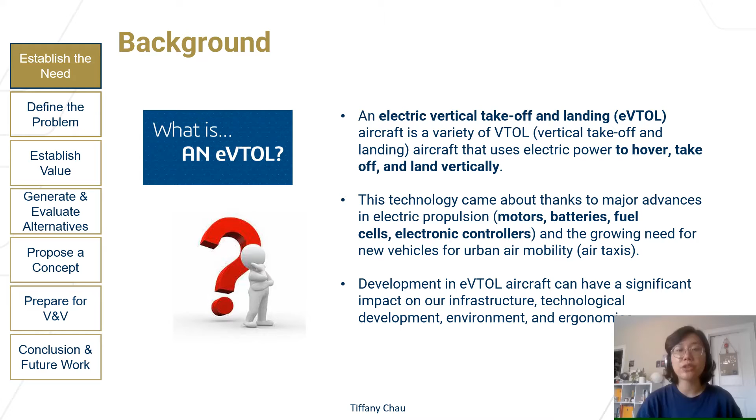First off, what is an eVTOL? It's an electric vertical takeoff and landing vehicle that's completely powered by renewable energy. The development in eVTOL aircraft can have a significant impact on our infrastructure, technological development, environment, as well as ergonomics.

Since the number of passengers utilizing public transport is increasing every year, having another mode of transportation, namely urban air mobility, can help alleviate that yearly increase. The development of more efficient renewable energy is an important technological impact, and this technology can help reduce CO2 emissions from commuter traffic.

Something our team is focusing on is also the ergonomic impact. This eVTOL design is going to be a fresh opportunity to incorporate accessibility for disabled passengers.

Now, we realize that we're not the only startup trying to enter this space and industry. There are other groups such as Joby Aviation and Kitty Hawk, which have some level of certification, some level of prototyping and testing either complete or underway, but neither of these companies have managed to enter the urban deployment phase. Because of that, our company has an opportunity to catch up.

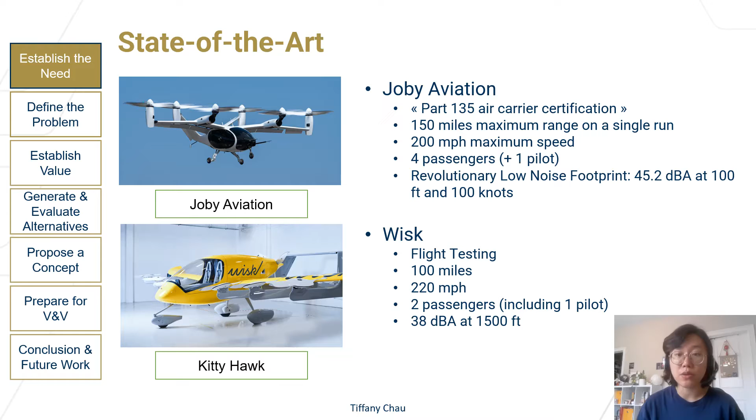And the same goes for VoloCity and Archer. The information we found on these startups is that they're able to accommodate passengers and pilots, but nowhere do they really mention a focus on disabled passengers.

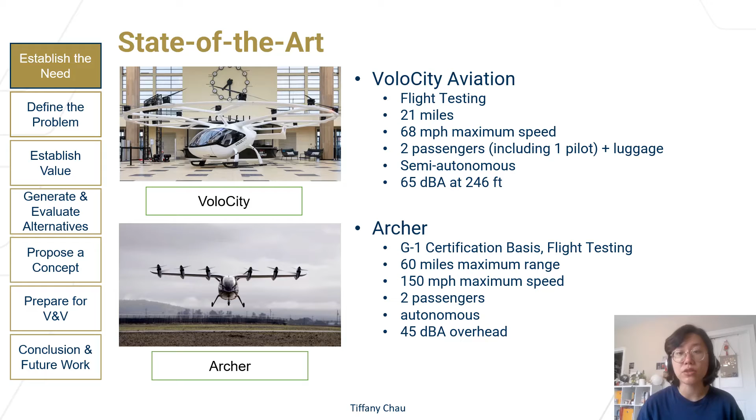There are many different stakeholders in our project. Passengers with reduced mobility are the first and foremost priority. They would like for this aircraft to be safe, comfortable, as well as affordable. Some other groups which would have a stake in our eVTOL aircraft would be the local community, since these would be deployed in residential areas, air traffic control, as well as electric propulsion engine suppliers.

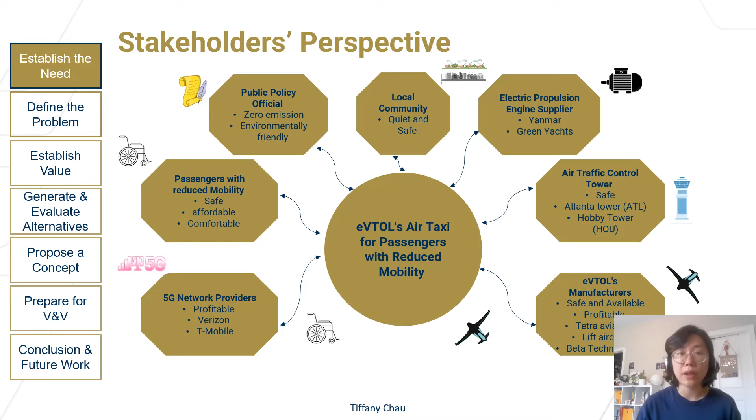From these stakeholders, we were able to derive a list of their implicit and explicit needs. This includes configurable cabin seating for those with disabilities, cabin navigation for people who are having difficulty navigating physical space, ingress and egress support equipment, completely battery powered, ability to travel a certain distance, etc.

Now, our team has mentioned a couple times that we want to design our eVTOL with the disabled passenger in mind. And why is that? Disabled people struggle every day navigating these traffic dense areas, and some of their disabilities impact the way that they navigate physical areas, such as the ability to climb stairs, navigate uphill terrain, navigate curbs and sidewalks, etc.

And then there are some disabilities that are not too obvious to the eye and impact their ability to operate vehicles like cars, such as people with limited eyesight and hearing. All in all, navigating the world is just highly stressful and uncomfortable for some of these individuals, especially in an area where the disabled person is not the primary user. And thus, we want to make them the primary user that we're designing for.

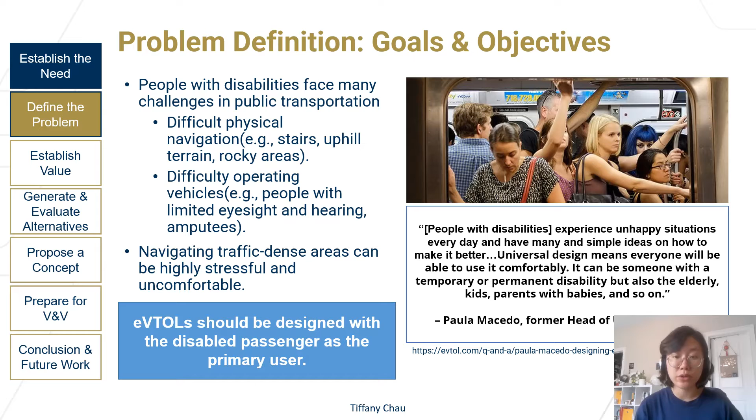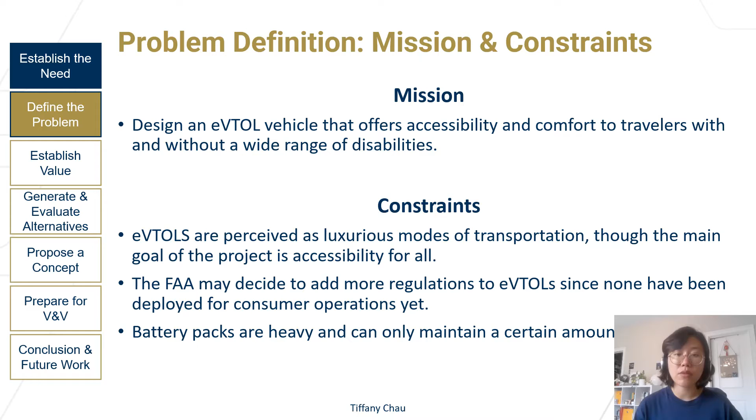And so our main mission is to design an eVTOL vehicle that offers accessibility and comfort to travelers with and without a wide range of disabilities. We have identified several constraints, and we'll be addressing some of those later on in our risk management.

Our concept of operation starts at the takeoff site. After taking off, whether it be from an urban, suburban, or rural area, the vehicle will be communicating with other aircraft, air traffic control, and other information sources during the flight. It will, of course, navigate the urban areas safely, which have a lot of tall buildings. And after landing at point B, the cycle starts all over again.

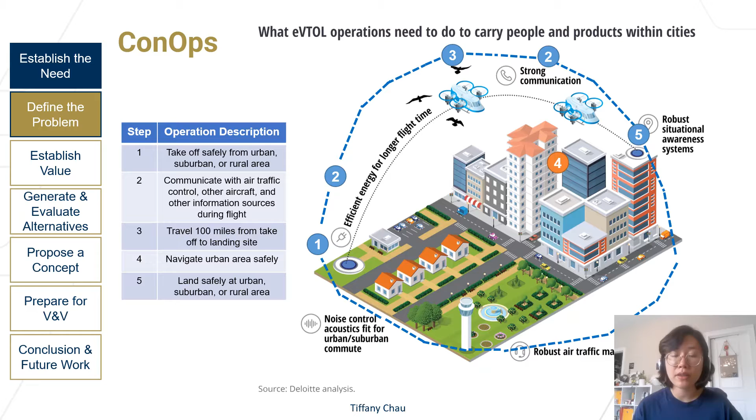And now I'll hand it off to Robert. Thank you, Tiffany. I am Robert. I will first go over the functional architecture of our project.

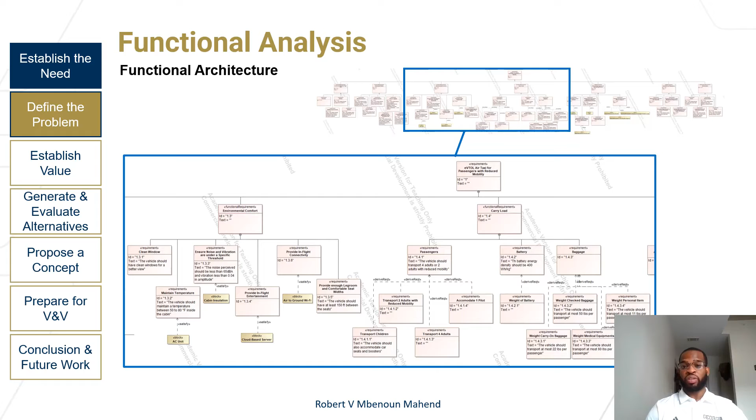For instance, looking at the second functional requirement here, carry load, we have 3 subsystem requirements: passengers, battery, and baggage. Each and every one of these subsystems has to relate to the main system by either satisfying it or verifying the requirement. As shown here in the environmental comfort subsystem, there are a few different requirements. If we pick maintain temperature, the vehicle must stay between 50 and 80 degrees, which requires an AC unit, which in this case will satisfy this requirement.

Moving on from the functional architecture into the high-level functional flow block diagram. Here, the design team focuses on the logical sequence of what must happen for each trip. First, there are the input functions stated here.

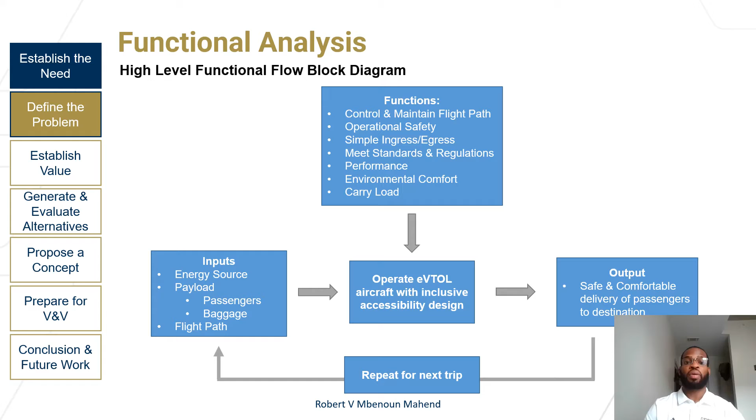The next part is at the top of the diagram with the 7 functional requirements previously discussed. The eVTOL must take those functions and operate with its inclusive accessibility design, which will result in a safe and comfortable delivery of passengers to their destination. This will apply to every trip of our vehicle design.

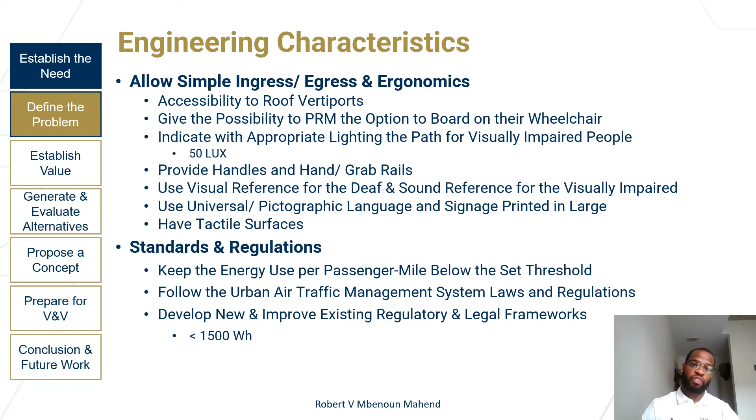Earlier, Tiffany did a great job of explaining the stakeholders' needs. We used those to obtain these engineering characteristics. This process took a few attempts to make sure every single part of the vehicle design was taken into account, from control path and environmental comfort to standards and regulation.

With these characteristics, the design team used the QFD to show the correlation between stakeholders' needs and their engineering characteristics. For instance, one of the stakeholder needs is having tactile surfaces, and we find it as our engineering characteristic as well. You can imagine that the relationship is positive for this customer need and its respective engineering characteristic.

Yet, looking at the correlation between tactile surfaces and flying at a set altitude of 2,000 feet, you can imagine that there is no relationship whatsoever between those two.

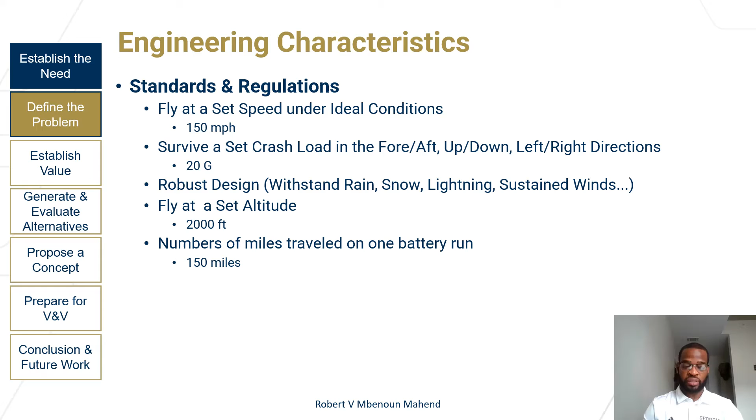Here is the QFD in question. It was used to ensure that the stakeholders' needs are well represented in the engineering requirements. As shown here, there are different parts of the QFD. All 11 house of qualities, or rooms, serve a specific purpose to make sure we gain the greatest value for the customer.

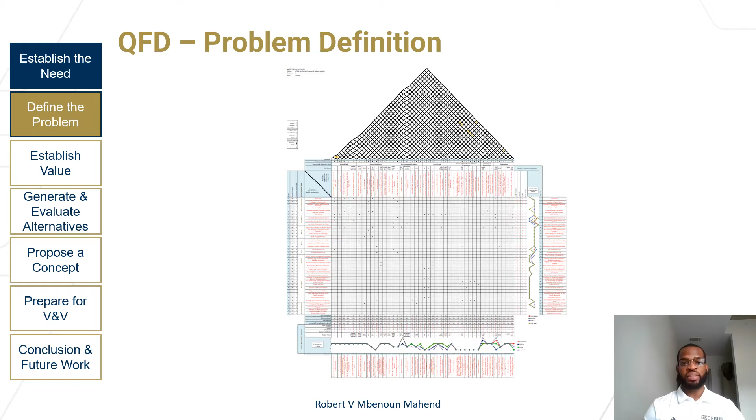Every room will not be talked about, though every room was meticulously worked on by the design team to ensure the quality of the design so that the stakeholders are in fact satisfied.

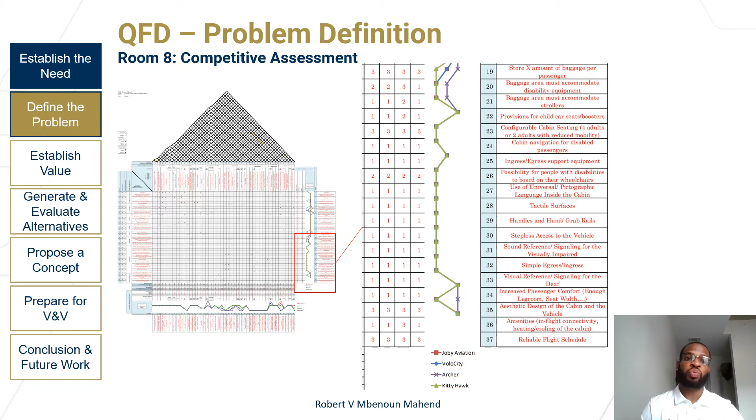Tiffany earlier highlighted the pros and cons of our competition: Joby Aviation, VoloCity, Archer, and Kitty Hawk. By looking at this competitive assessment, it is visible how the other 4 different competitors rank with respect to the customer requirement and support what Tiffany mentioned.

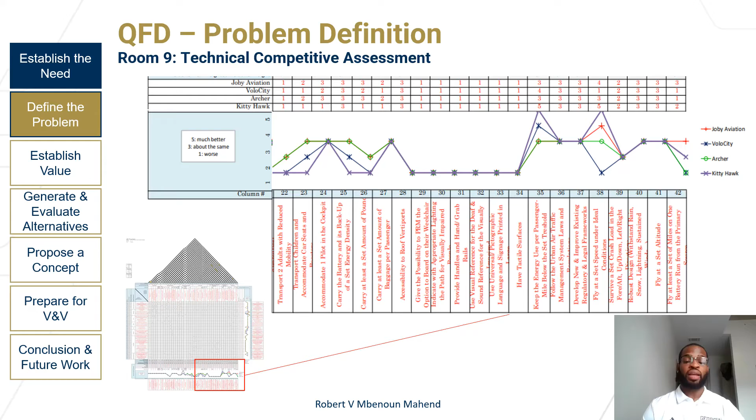Similarly to the previous room, here it compares the competition to each engineering characteristic. The competition designs failed to be equipped for passengers with reduced mobility, as shown here and supported in Room 8. Another reminder of why our design is better for passengers with reduced mobility, evident after looking at how companies fail to accommodate for all passengers.

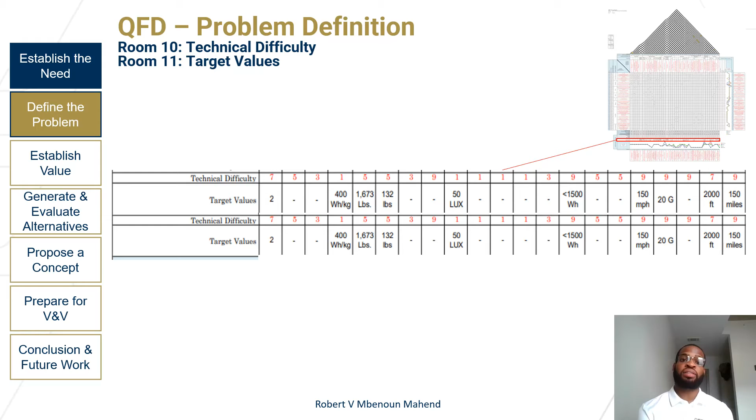The last 2 rooms of the QFD are technical difficulties, which simply ranks the ease at which the engineering characteristics can be achieved, and the other room contains target values of those engineering characteristics.

From the QFD, the design team was able to come up with specific, measurable, achievable, relevant, and traceable high-level requirements. To illustrate this, here is an example.

To sum it up, the design team used a QFD which in itself has parts that work together by analyzing them and interpreting the results. SMART requirements were obtained to satisfy and generate great value for the stakeholders.

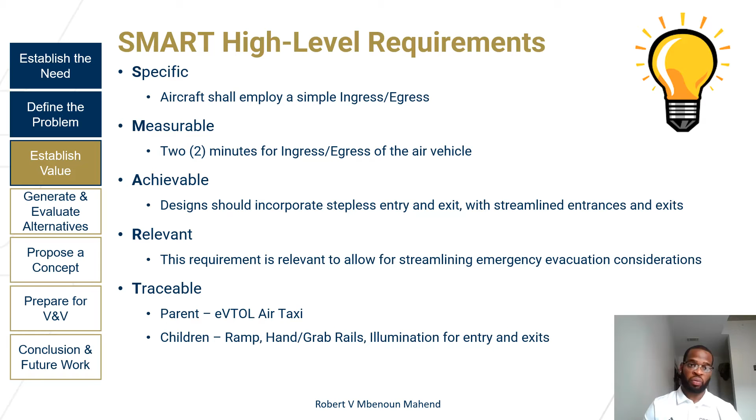Now, up next, William will be discussing system decomposition.

Thank you, Robert. Now, to better study our aircraft, the design team broke it down into 6 separate subsystems. For the sake of time, we have decided to choose what we believe is the most important subsystem to further decompose: the payload, as achieving both the power and energy requirements at a low battery weight is essential for the aircraft to even take off and land safely.

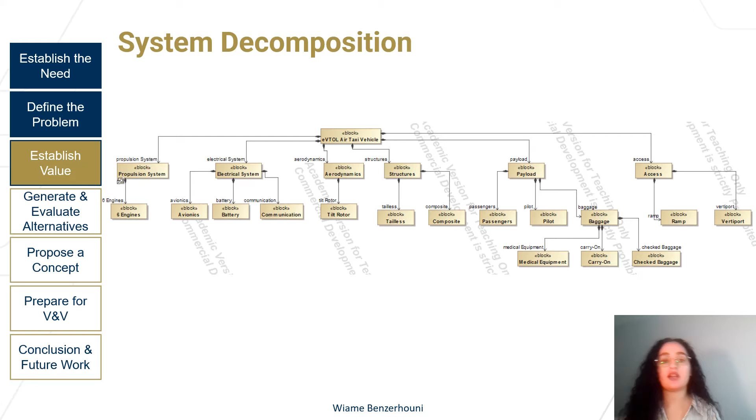We have then listed some requirements derived from the RFP alongside some different values that were used in creating our parametric diagram. A simple parametric diagram is built for the payload systems.

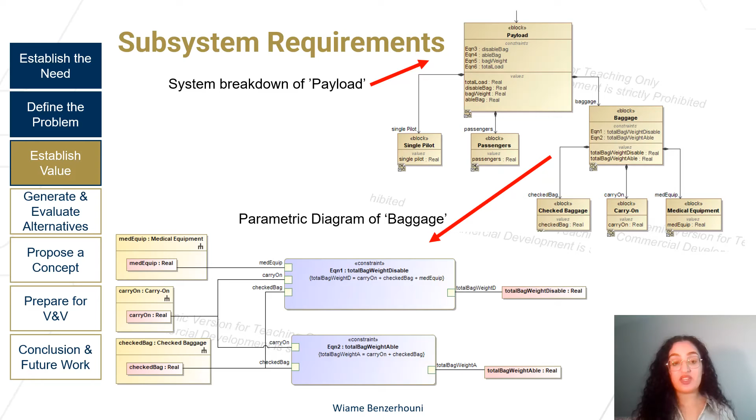Formulas were developed to first account for all types of luggage, carry-on, checked, and medical equipment, so that was added to the weight of a passenger to finally get the weight of a single passenger with their luggage. We then added up that number for all the passengers to get the total load, to which we added the empty weight of the aircraft to get the overall takeoff weight of the eVTOL.

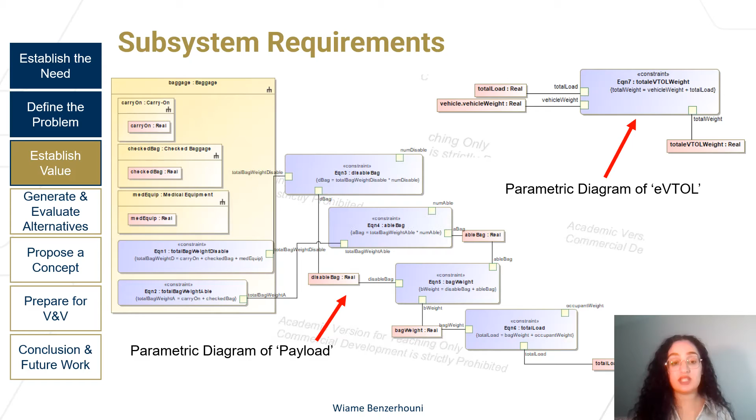Now, as you may have seen, there are multiple requirements. The top-level customer requirements were weighted against each other. These requirements were prioritized in the final design of the vehicle.

We down-selected safety, green energy, transportation of disabled passengers, VTOL capability, and a reconfigurable cabin that can transport 2 passengers with reduced mobility and hidden disabilities, or 4 passengers.

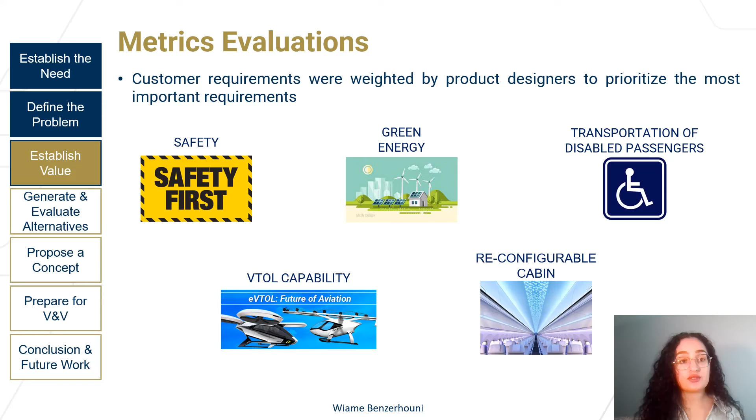While having the top-level system requirements in mind, the most critical parameters were defined by the product design team. The next step was to define a metric to evaluate each parameter and to define success criteria to gain customer acceptance. For example, to ensure safety, we want to be able to evacuate passengers in less than 2 minutes.

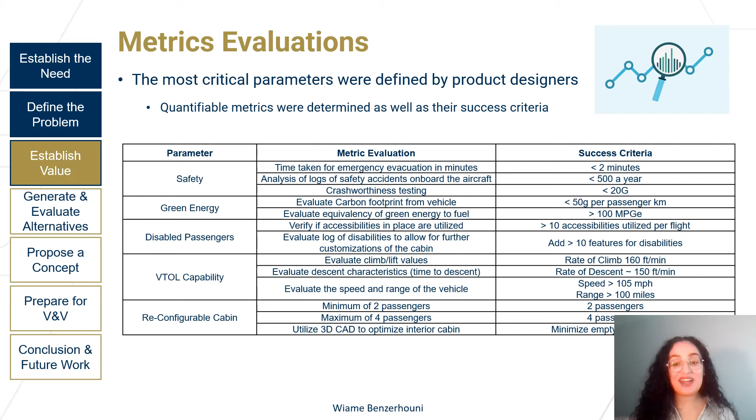After wrapping up the technical aspects of the project, we are now moving to the fun part, the design of our aircraft. We have reviewed multiple designs out there, but unfortunately, none of them are really inclusive.

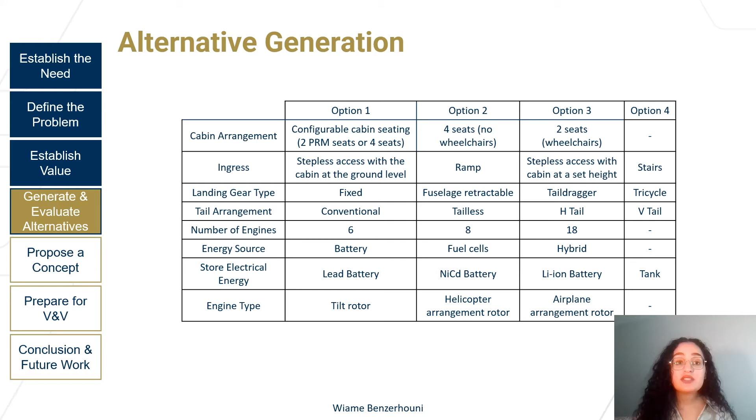So what we did is come up with multiple alternatives with different options. For the sake of time, we shortlisted the 8 most important ones, from the cabin arrangement to the number of engines and the energy source. We used the different alternatives and options to put together 3 different designs using the morphological matrix.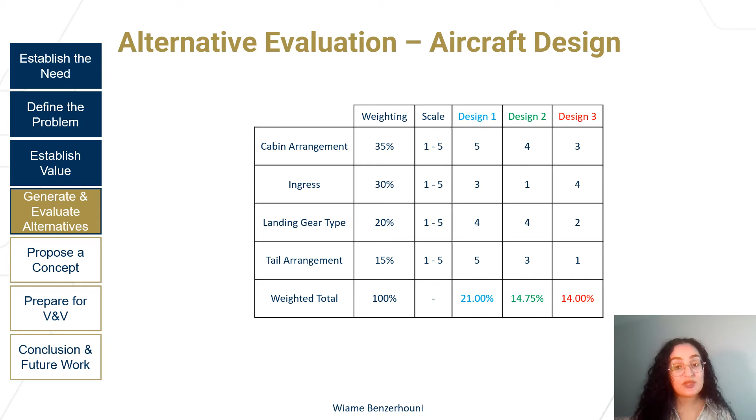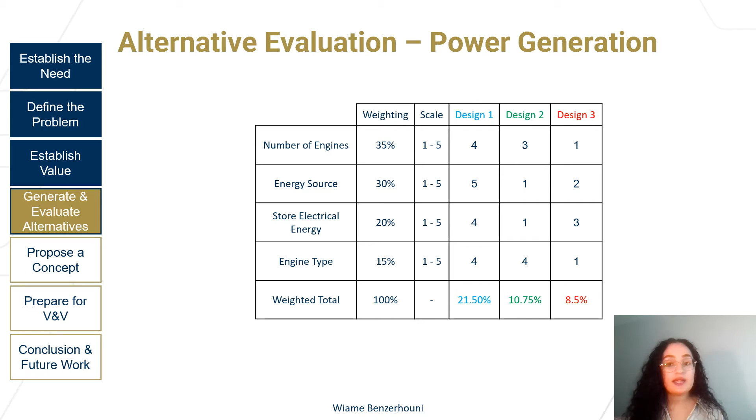On the other side, we have power generation. The number of engines is the top alternative here. Again, design 1 is the favorite. Both sections are then combined to have the overall weighted total. Both portions have equal importance. The first design is clearly our winning design by far.

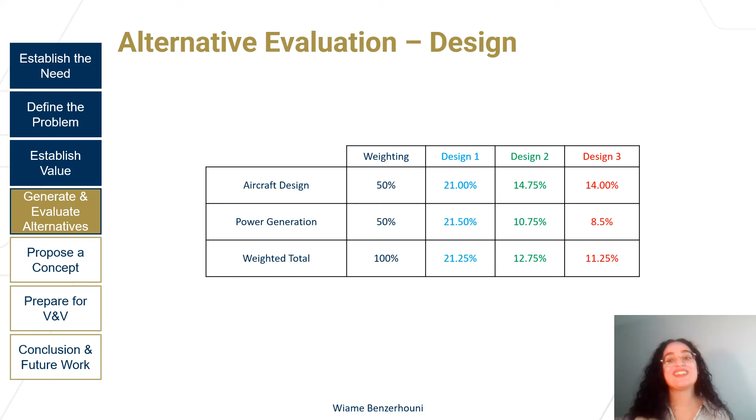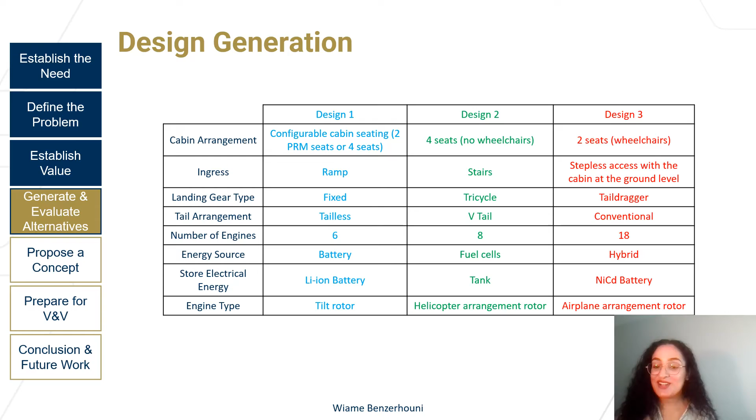Now we will be unveiling our design. Drum rolls, please. Take it away, Sakib. Thank you, Wiame. My name is Sakib U Ahmed, and I'll be starting off with the concept of our design.

Now, lo and behold, the conceptual design of countless hours of synthesizing customer requirements against design limitations. Some of the key parameters of our eVTOL aircraft include 6 engines with 6 tilt rotors that allow our aircraft to operate with one engine inoperable and allow for optimized handling characteristics, which all increase the safety of our passengers. A full, spacious, configurable cabin with the option of up to 4 seats that allow for comfortable transport, all within the proximity of one's medical equipment.

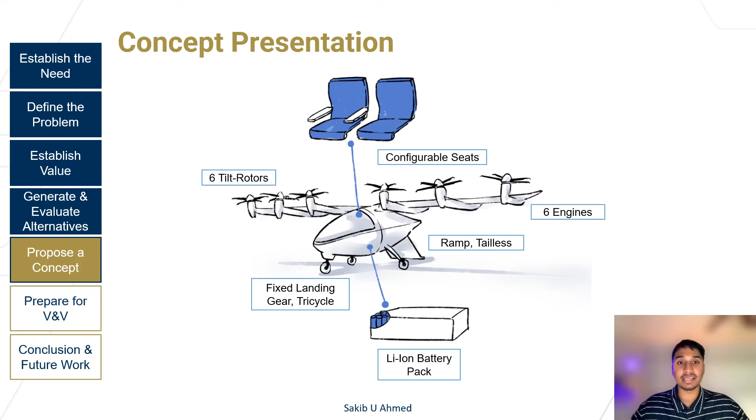A tailless design was selected to fully optimize egress and ingress in case of emergency situations. And finally, a fixed landing gear with shock-absorbing properties was selected for simplicity to reduce overall maintainability costs and increase overall safety. I know, it all seems too good to be true.

So the product engineering team has put it upon themselves to put together a verification matrix to fully verify and validate each requirement against its target values. We have a wide range of tests stemming from flight tests to inspections and plain old measurement tests. The next few slides will cover our verification matrix.

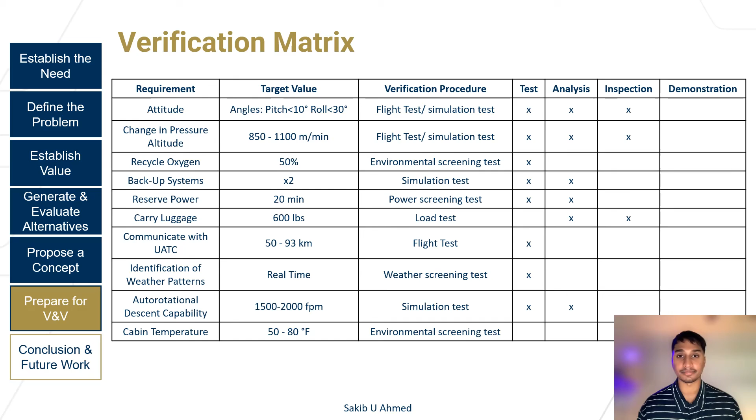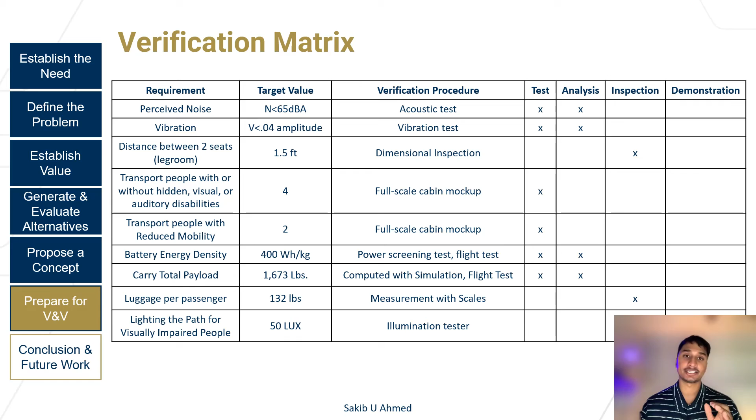Other than the traditional flight tests and ground tests, our team wants to deploy a full-scale cabin mock-up to fully verify and validate spacing constraints for our passengers. Like most electric vehicles, it is important to quantify energy usage per mile and passenger.

Like all great marvels of engineering, with great innovation comes great risks. So our product team has formulated a risk register to proactively find ways to mitigate risks before coming into fruition. 2 of our most concerning risks are related to bird strike and battery fires.

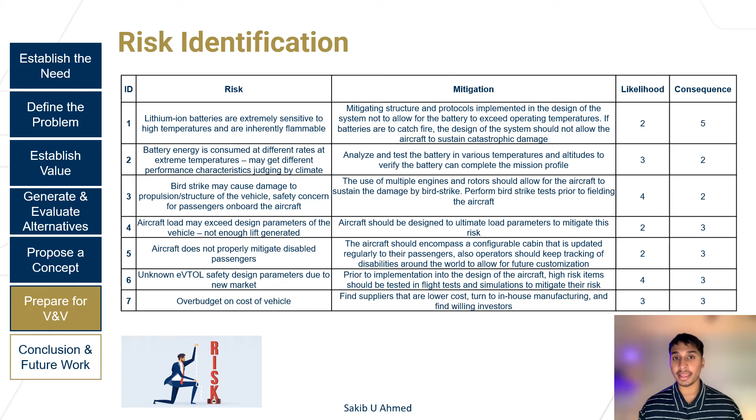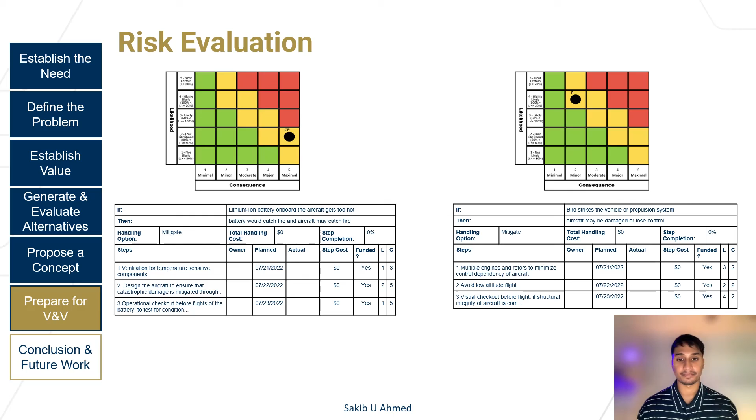In this chart, you'll see a sample of the necessary steps the team has taken action on in order to mitigate these risks. In conclusion, our design of an electric VTOL vehicle encompasses what the product design team believes to be the most critical aspects for our stakeholders.

To promote a safe and carbon neutral flight for disabled passengers that don't have the luxury of air travel at their own convenience. This vehicle will be able to take off and land within a minimal footprint to allow for quick turnarounds, which lowers personnel required for flight, ultimately lowering the operation cost.

The simplistic yet configurable design of the aircraft allows this aircraft to be fully customizable, such as for emergency response or disaster recovery, where all the amenities are already on board the aircraft to promote a safe and effective environment for reduced mobility passengers.

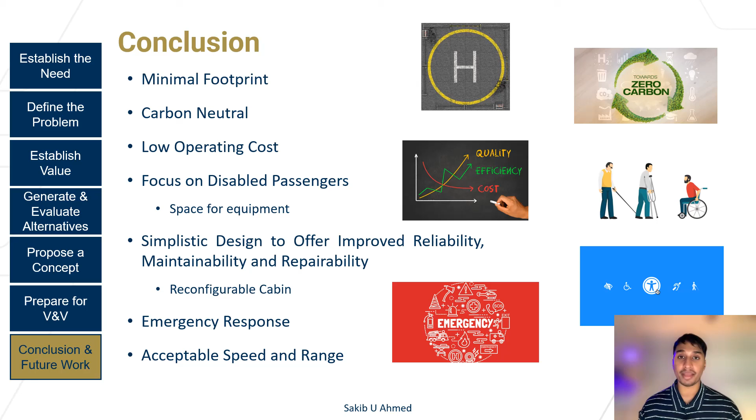The design team has already started planning for the future of this aircraft, where innovative power generation techniques can be applied to sustain longer flight. Skydweller Aero, for example, has been testing an aircraft with solar panels spanning their wingspan to generate power for sustained flight.

We are also keen on looking into advancement in battery technology. Like Tesla, who manufactures their own batteries, they have been able to increase their range and power from their preliminary designs. 70 to 80% of all aircraft incidents are attributed to pilot error.

To promote a safer flight for our passengers, the engineering team is looking into autonomy, which would not only increase the safety of the aircraft, it would allow for more passengers or equipment on board, ultimately increasing value for our stakeholders. This concludes our presentation.